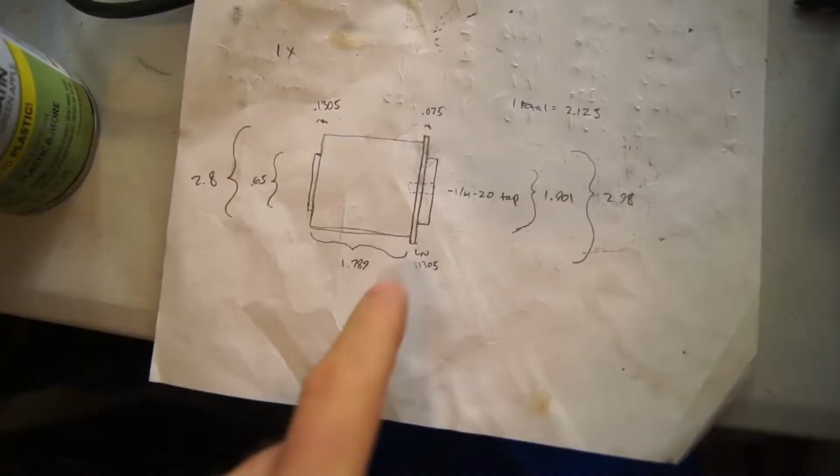I've just been working off of drawings like these guys, and I just have this drawing. It's a lot easier than working off of my computer. And I have all the measurements that I need right here on this drawing. So this is what I'm gonna be working off to build this guy. And I always do it once, then I always double check it just to make sure I didn't mess anything up on the actual CAD. But this is what we're building right here.

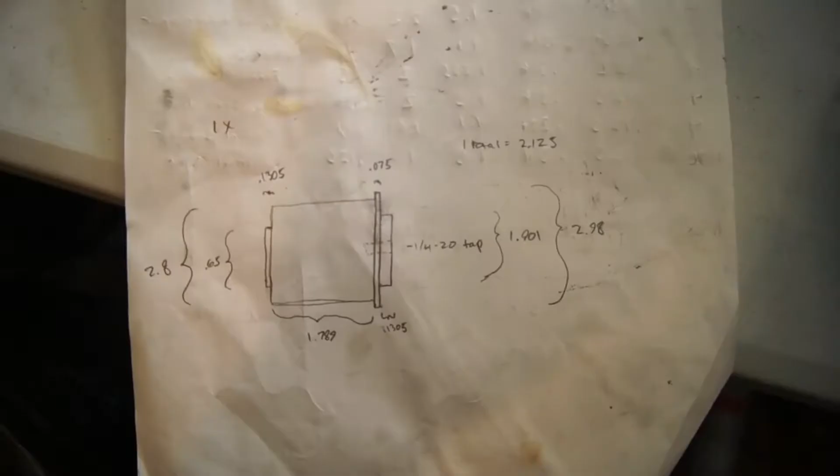One thing I want you guys to be aware of if you're lathing stuff is you have to hold the order of operations in which you make your part. So there's geometries where I'm gonna have to flip this part and pick up the other side and machine stuff into the other side. So the question is, do I machine this part first or this part first?

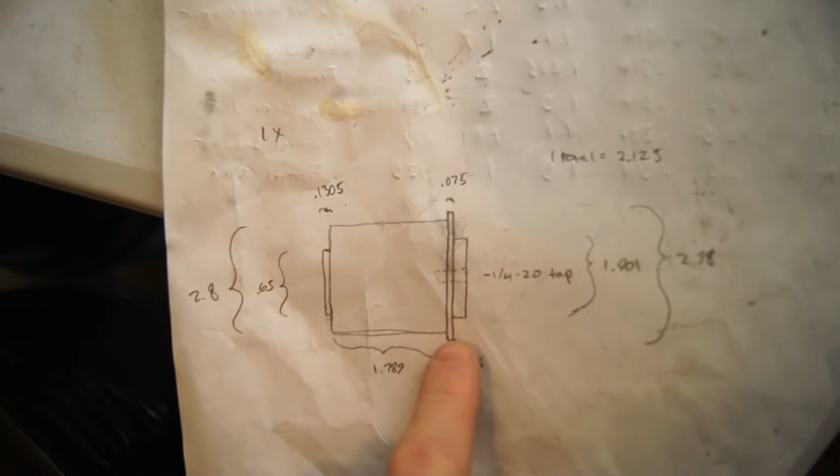Well, if I machine this part right here first, I would have nothing to grab onto here because I have this thin little wall here. So I'm gonna machine all of this part first, and then when I flip it around, I'll be able to grab onto that in order to machine this stuff in here.

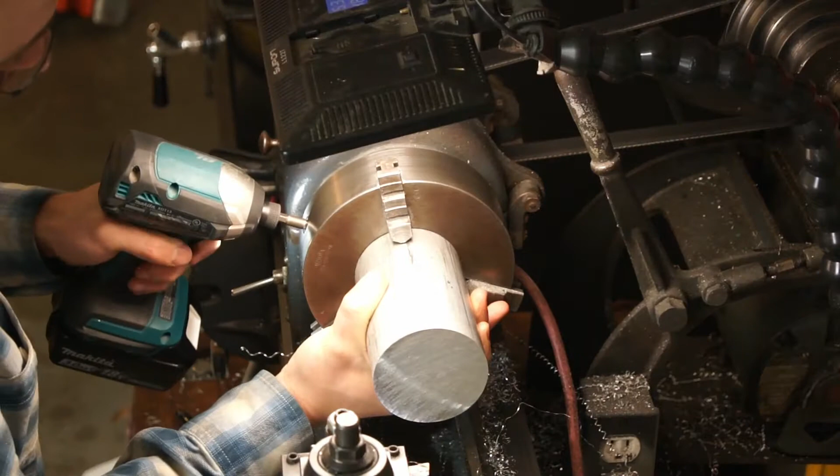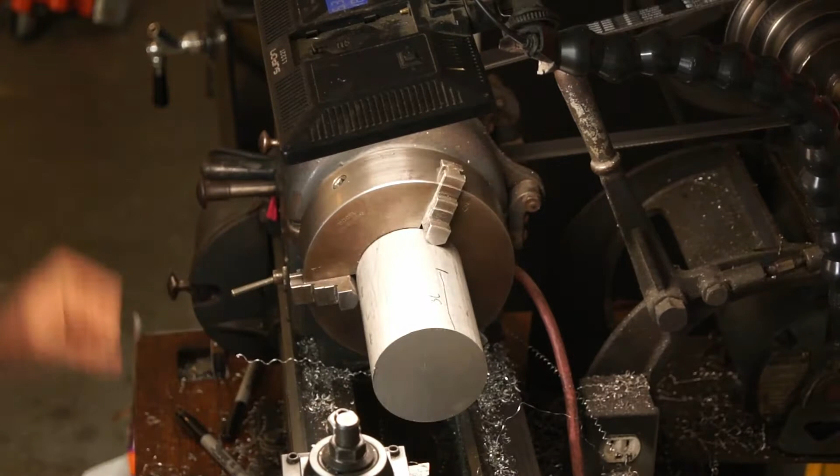It's a big chunk to have in here. It's the biggest piece I think I might have ever had in my lathe. So I got this in the 3-jaw because we don't need high precision on this op. We'll switch back to the 4-jaw in a second. So first off, we're gonna face up this guy.

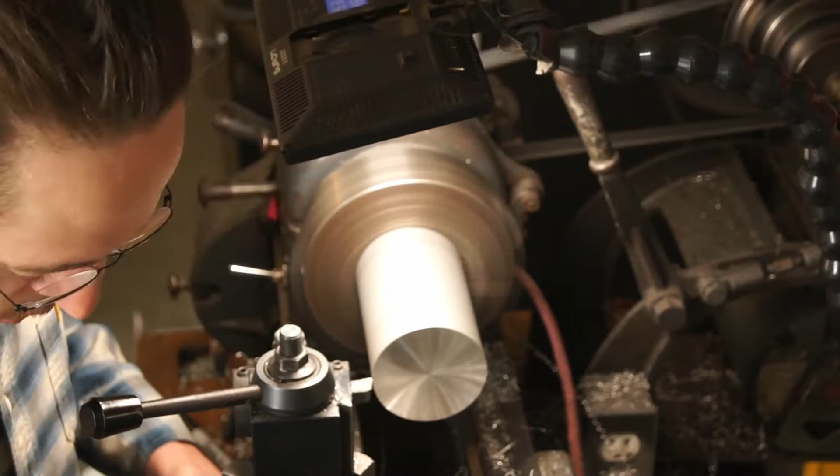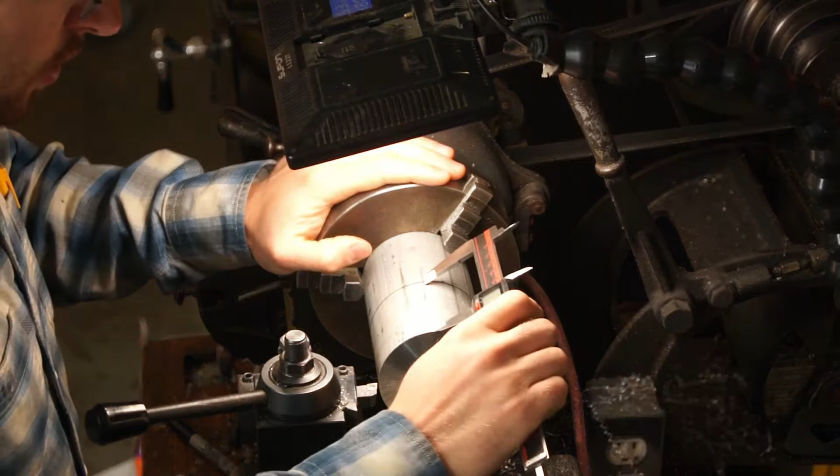Alright, that is about the overall length, so we want to go up to a little past that because we want a place to cut here. Yeah. So now we're going to clean up this OD right here.

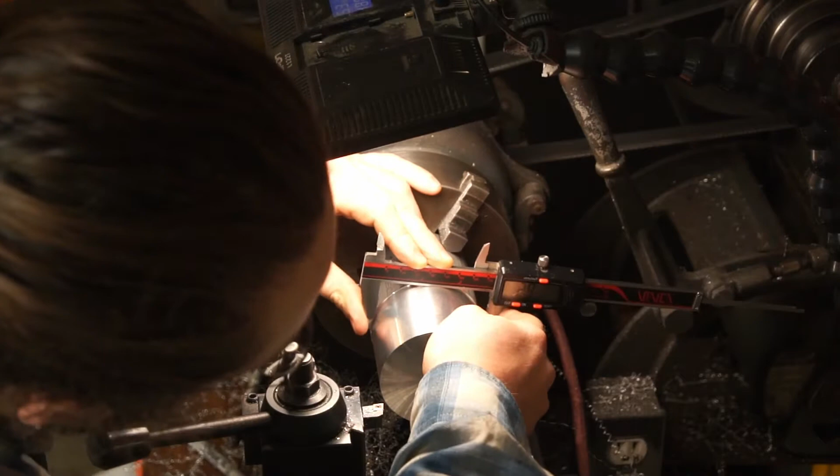Okay, so my machine is cutting on a slight taper, and that's because there's a twist in the ways. These are the ways, so they're a little twisted, and I think they're twisted this way, so I probably could drop that foot down and maybe take some of that out. I'm not going to mess with it right now, but I'm aware that there's like a 2 thou difference here, right? So it's 2 thou thicker here than it is here, which means it's twisted this way, which is pushing this forward, most likely.

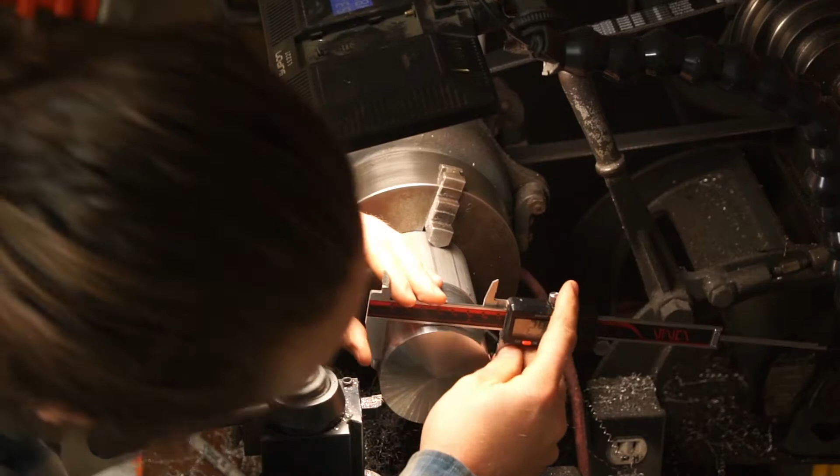But anyway, we got it to where here it should be really close to 296. Let's just see here. 2962. So 2 thou, that's within tolerance for me. I'm not too worried about that. Boy, these calipers barely make it down there. A little worried about getting a good measurement, but they are going down all the way.

So now we have that diameter. So next we're going to cut in the first shoulder, and then we'll cut in the last shoulder. Then we'll get all the lengths dialed in, and then we'll flip it over and do the other side.

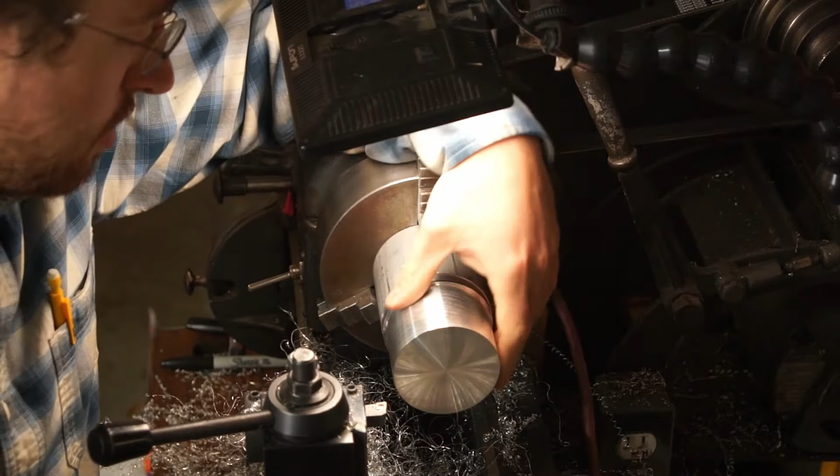I've been hitting these lately, and I don't know, I'm not doing it intentionally. I'm like, oh, I'll set it there, and for some reason I'm coming into within like a thou on these guys, which is amazing. I think it's just a little bit of luck, and also I've just been doing this for 4 days straight, but kind of wild.

Cool, so now we're gonna set up and we're gonna cut in the last one on this side, and we'll do the other one. So this is pretty thin because it's half depth, so 1.305. So I'm setting my caliper depth to 1.305, which is the depth of this shoulder, not the diameter, but the length. And then

I'll just come in here with a Sharpie and mark it, and I'm marking to the front corner, so like the front side of that, and then I'll come in here. I think I need the other Sharpie. Let's try this one. Okay, and I'll set a mark, and then I'll figure out how far off that mark I am, and in this case, God, it's a shitty mark.

That's better. Just a little better. We're a little far off of that. Let's try one more time. Alright, so I'd say like a little bit in front of it. So I get there, and then I figure out where I am in relation to the mark, and I just kind of cut by eye, trying not to go past it.

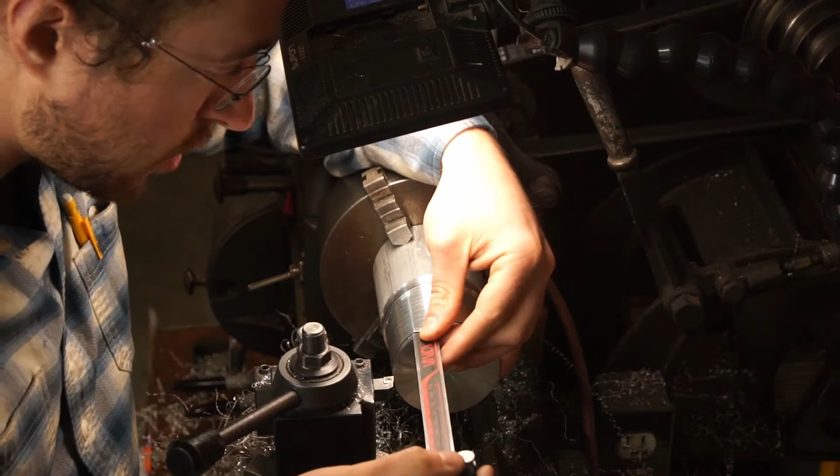Now I normally use the power crossfeed to do this, but I think this is such a small depth that I'm probably going to run most of these by hand, because I can stay pretty consistent over such a small stroke. And that looks almost perfect. So now we're just going to bring it down. We're going all the way down to 0.65, so it's a pretty small little nug there, so we won't measure for a little while here.

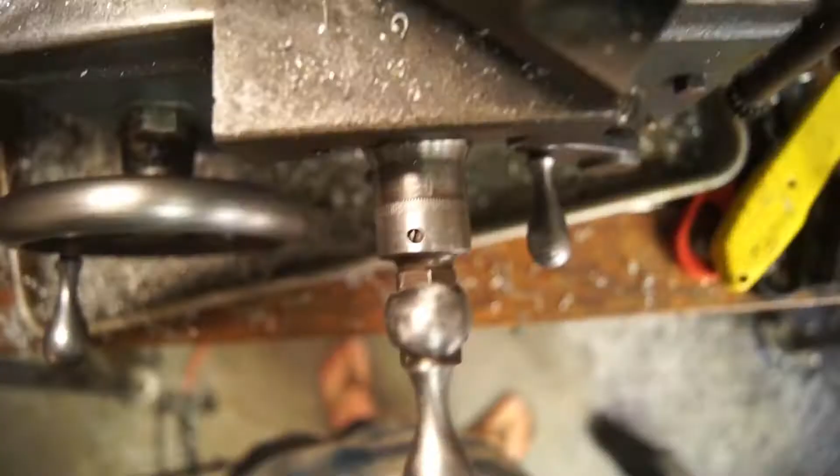I thought this may be an interesting learning experience for people who don't have like a really nice lathe with a DRO on it, or if you don't have a lathe at all and you're curious how I'm doing this. This is taking each one of these lines here. I'm not sure how well you can see it here. Let me see if I can get you guys a little better. Yeah, there we go. It says 0 and 90 right there. So each tick is a thou off the radius. So I'm going in 10 thou and then making my cut.

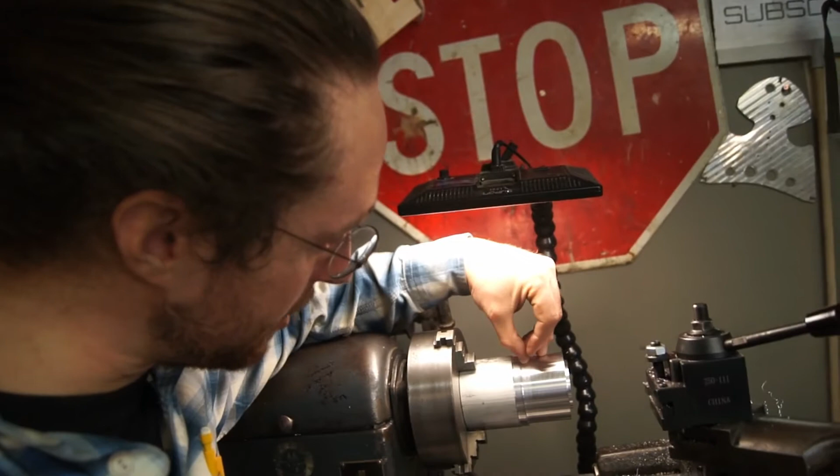Okay guys, I stopped filming because frankly it was embarrassing, but this little piece at the end, this piece right here, I got the diameter wrong on it twice. Super embarrassing. So I had to bring this shoulder back twice. There's a little bit of, what's the word, evidence of me having to do that on there. Now this is more than good enough surface finish for the Mark 1, and way more than enough precision.

So I got these two shoulders. First I got all the diameters in correct, and then I did this shoulder, then this shoulder, and then this length right here. So I got this length first, and then this length. And now it's all dialed in. So we're gonna throw some chamfers on this, and then we're gonna drill the hole through the center for the quarter 20 tap. And we'll tap it, and then we'll flip it over and do the other side.

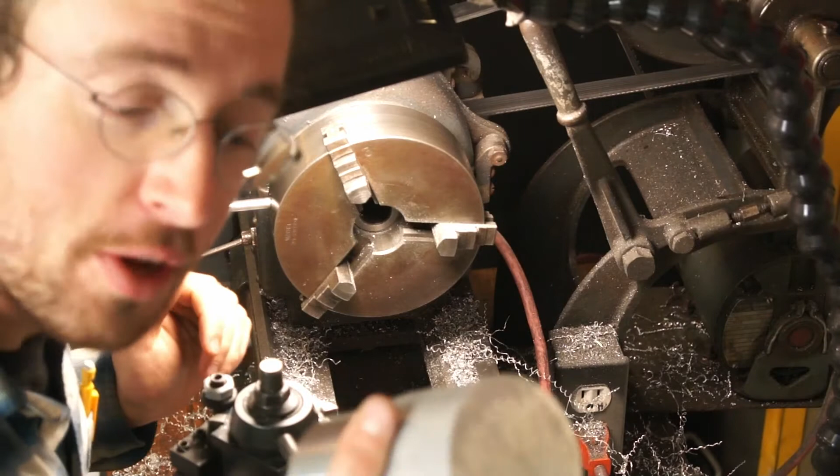Yes, I know I didn't drill a hole in this because the hole goes on the other side. Apparently I'm destined to start messing things up as soon as I start filming them. But we're gonna get this guy done.